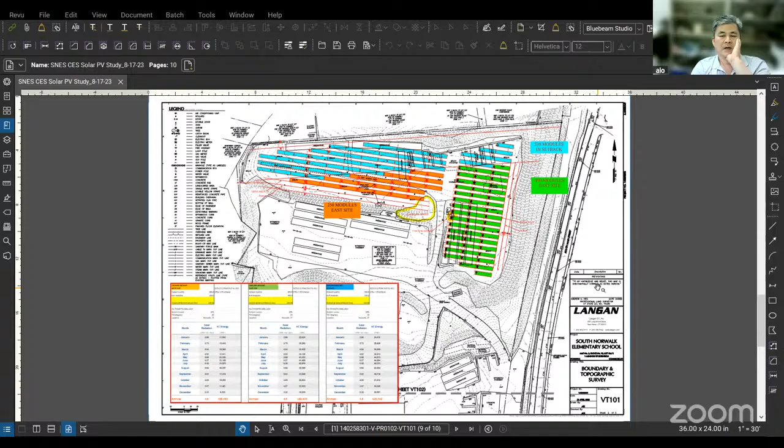So what you see here in front of you is the upper portion of the site. We were considering putting that many solar panels on the ground. And this is the footprint of the building, and we're going to put that many solar panels on top of the roof.

Because this is SNEW territory, SNEW becomes the developer of this project, and that's where some of the challenges begin to appear. The way it was originally going to be set up, the strategy was that this solar system can be put in what you call before the meter or after the meter.

When you put it before the meter, that means you're supplying electricity back to the grid. When you put the system behind the meter, that means the electricity you generate is being used in the building, and when the building isn't using as much power, you feed back to the grid and the meter turns backward. So before the meter and after the meter mean two different things.

For this project, the way we were envisioning it is that SNEW would develop the solar system, and it would be before the meter. That means all the electricity the ground-mounted system and the rooftop system generate would directly feed the grid. Meanwhile, the City/Board of Education will be paying for electricity based on the amount we use. The meter will operate normally, and we will pay electricity the way we normally pay SNEW, and there's no savings on it.

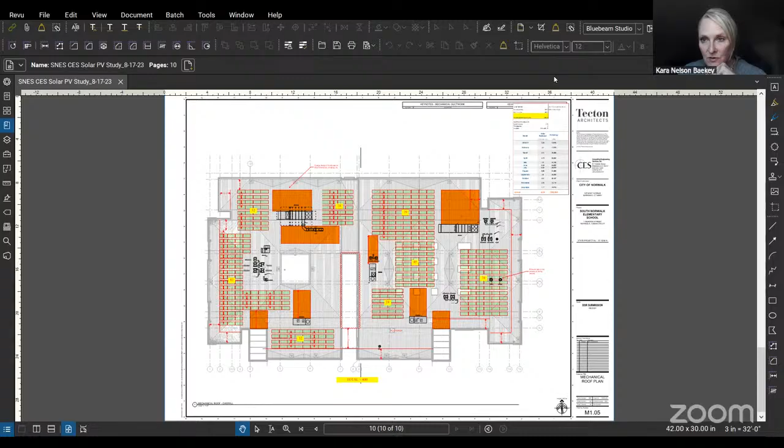So that's another angle we can look at to see whether the financials of this work. Looking ahead for opening day, safe to assume we're just going to be using traditional energy sources? And what does that look like?

SNEW has mentioned that a certain percentage of the power they buy is already green, so it's not like... I mean, there's using electricity. Right now, when we design a new school in today's world, with energy efficiency in mind, the way we design this building, probably around 80% to 85% of buildings run on electricity. It's the current strategy in the industry to design buildings using more electricity.

I think that's a good and bad thing. Initially, the electrical cost is going to be higher because you're heating the building with electricity. But the theory is that as time goes by, electricity from the grid is going to get greener and greener. So that's the industry strategy in terms of making buildings more electrical. Also, with electricity we can use more heat pumps, which are more energy efficient. So it's a combination of different things - that's why 85% of these buildings run on electricity.

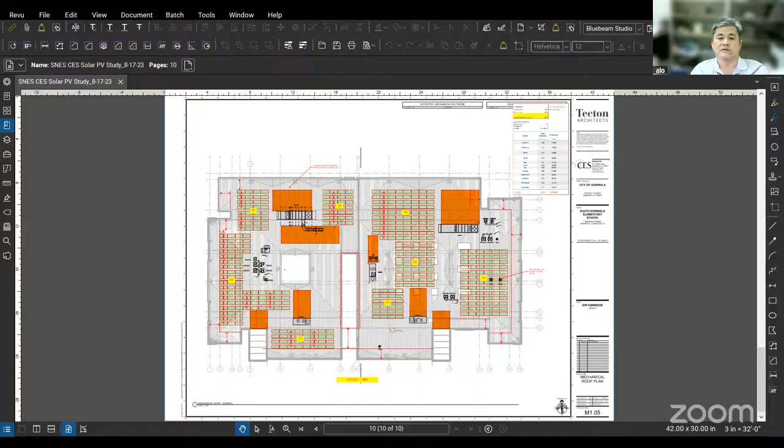And the places where you still use natural gas really come down to areas like the gym, the larger spaces where electricity heating doesn't make a lot of sense. When you use natural gas to heat mechanical equipment, it's a little more efficient because it's a large space. So anyway, that's where we are. Thank you.

Anybody else? Alan, were you also going to discuss the Norwalk High School P-TECH project solar? Yeah, I want to just briefly hit that a little bit. Are you guys okay? I apologize. Is everyone okay with us moving on to the next project? Is that okay? I'm good.

So Norwalk High School - we also plan Norwalk High School. Currently our plan has two features: one is the rooftop system, and the other is the carport system. Dan, can you put up that report? Yep, I'll put it up right now.

Because Norwalk High School is a multi-year construction project, at this point we are not prepared to apply for any incentive money, and it gets very complicated. But in any event, here's the footprint of the new Norwalk High School, so you can see the number of panels on this building.

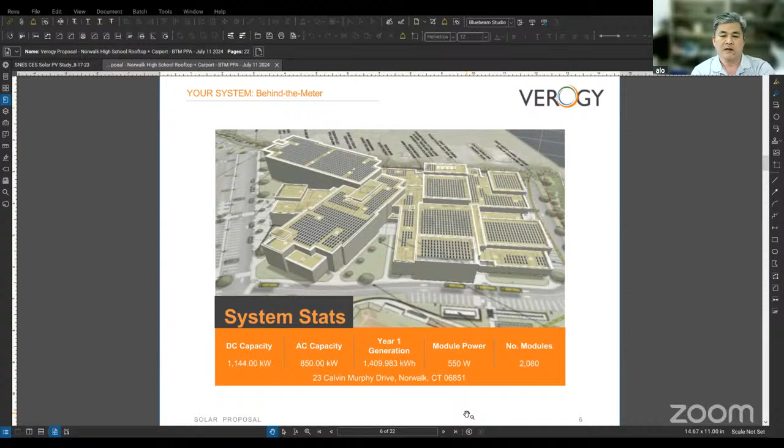Additionally, Dan, go down a little bit more - you have a few pages to the site plan. Right there. Additionally, this project actually included carport solar in the front parking lot. There's been different discussion about that.

The additional cost - when you do a rooftop system, it's pretty straightforward and not very expensive because the systems are put on racks on top of the roof. But when you do a carport system, it has a whole structural system that supports the carport, and there's also large footings underneath to support the cantilever arms that come out to support the solar panels.

The cost makes a difference financially when you do a carport system - it's not as cost effective in terms of savings. When you look at the rooftop system, over 20 years the savings I believe is like $600,000. Meanwhile, the carport system is about $170,000. And we figure the present value of $170,000 over 20 years is not really a lot of money.

But what we give up is a very difficult sequencing in terms of construction to put this in while we're trying to renovate the building and tear down the existing building. We also have a whole storm retention area underneath below the structure, so coordination and all this becomes a very challenging issue to manage.

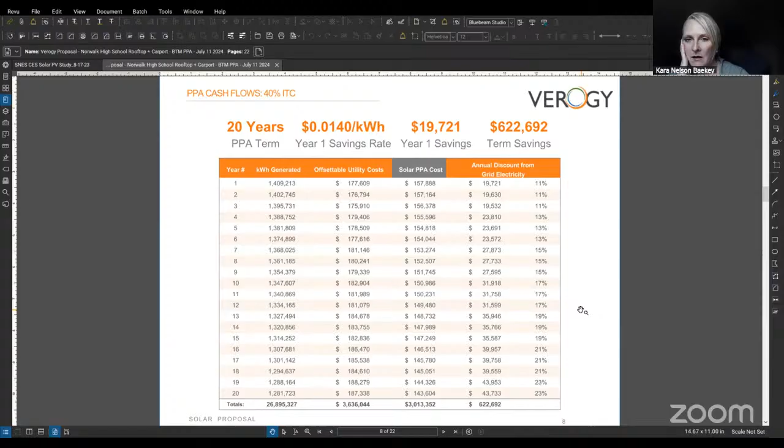So we have time, obviously, to figure that out, but I understand the carport is not as beneficial as the rooftop here. My concern, I mean, I love the idea because of the savings, but my concern on the carport, not so much the new drivers—

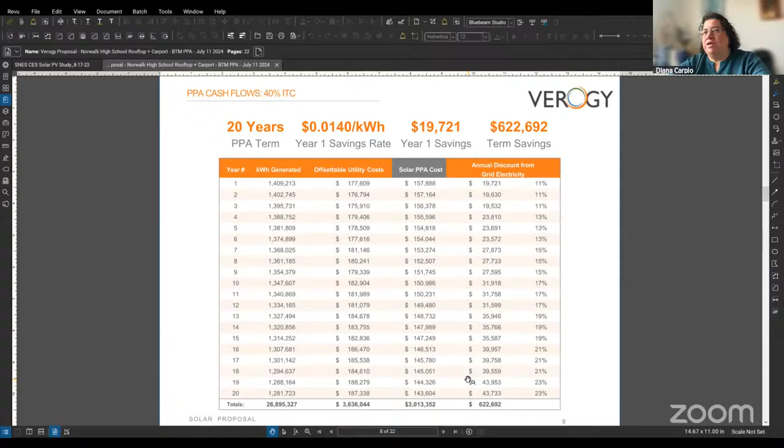Can we go back a couple of slides to show that? Is there room for emergency vehicles like fire trucks and things like that? I'm looking at the building in case—you have the car parking there, but also in case of any type of servicing, like if you need a big truck for anything in particular, if something happens at school.

Yeah, I think there's definitely pros and cons. Some of the things we talk about is that even though it's not fully covered, underneath the solar panel is covered, but at the same time you still get daylight coming in between the aisle. In wintertime, snow-wise, you get a little bit of snow drift, but at the same time it's actually a good thing a little bit.

On the other hand, it does create a little darker shaded areas for security purposes and concerns and stuff—there is that kind of aspect. I'm not trying to sell this or not sell it, but we consider all these factors. At some point, is it worthwhile to do this?

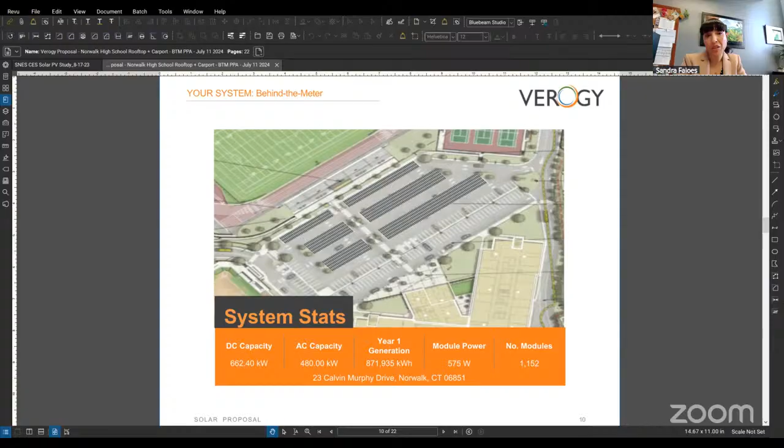Thank you, Alan. Alan, just make sure that you keep us in the loop if this comes back up with either the Common Council or land use or anyone like that, because I don't want to lose what the members of this committee have shared in terms of our concerns with the sight line and the possible safety concerns that can cause for us.

Very good, thank you, thank you so much. Alan, we had another point that you were going to discuss on tariffs, and then I think we're going to turn it over to Dan for his updates.

Sure. I think everybody's aware that as a country there's a lot of conversation about tariffs and how it impacts overseas material and products coming into the country. That has come up in different conversations. When you look at the project we have currently, South Norwalk School is not going to be affected as far as I know, because as some of you visited the site about a month ago, the steel and everything is coming in, and in terms of commitment to material, we passed the point of getting raw material from overseas. So it should not have any impact on South Norwalk School.

However, Norwalk High School has that potential. Generally speaking, we're roughly probably 40% complete on steel erection, and all the structural steel has been bought already, so I don't think it's going to affect us in terms of steel as a raw material coming overseas or the overall market.

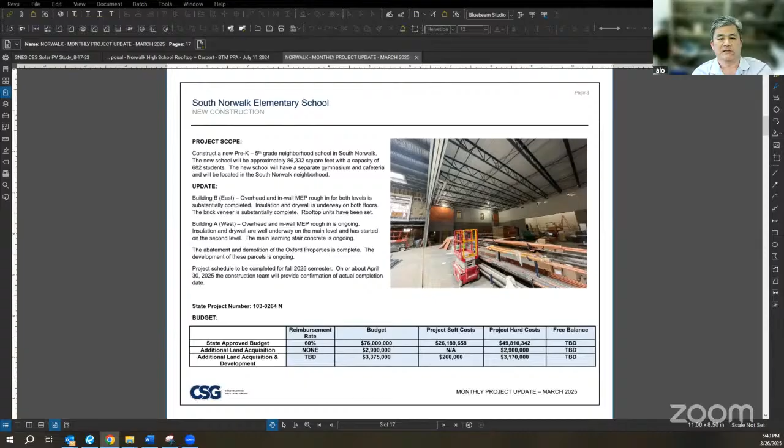So it's a very challenging issue. To push them, typically we'd have a bond to challenge them and enforce the financial aspect of the requirement, but when it comes to the manufacturer, there is none - you generally have to go sue them. It's playing softball and hardball at the same time, trying to push and get what we can. It's a lot of negotiation, working together and against them to find common ground so what they promised to deliver, they actually deliver. We need the rest of April to confirm we'll get the delivery and that our options will hold. So there are still challenges ahead of us. Thank you, fingers crossed.

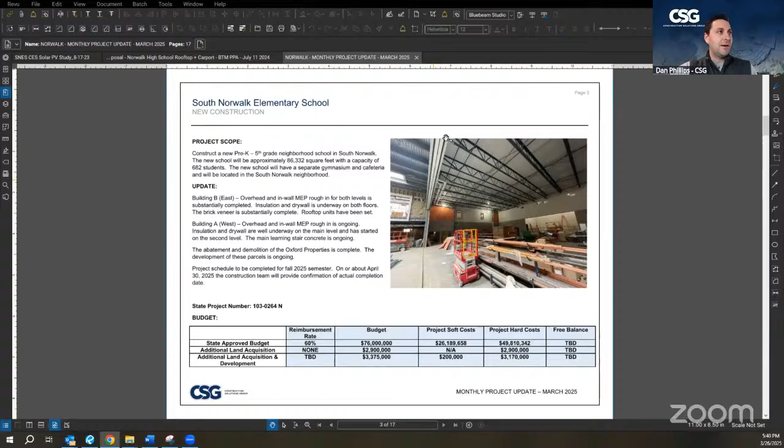As noted before, here's a photo of the gym on the right, cafeteria on the left, and that dividing curtain would be right above where this photo was taken from. This is the service area side of the building, the east side, the side we started on, so it's the most progressed. You can see the second floor glazing has been installed, and there are temporary doors on the first floor with the frames installed.

We rotate to the front side of the school on the south side. This is the cafeteria entrance. You can see to the left here in the stairwell, lots of light with that glazing going in, and above that entrance, glazing should be installed shortly.

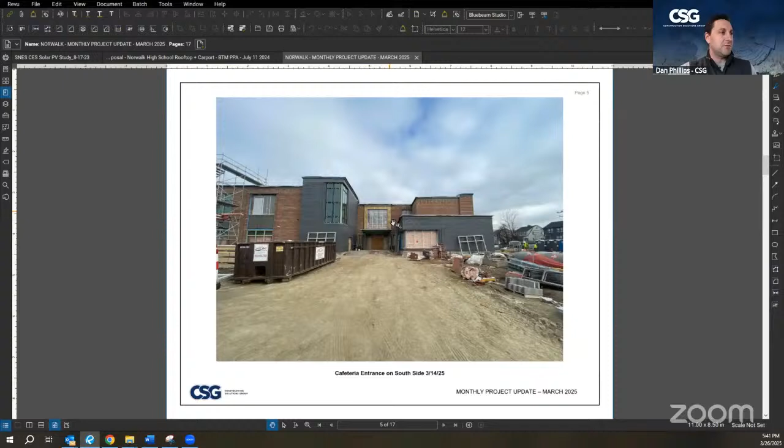Stepping back on site, over to the right here is that same cafeteria entrance, and to the left where this red truck is parked is the main entrance to the school with the main corridor and the learning stair behind it. You can see some of the curbs taking shape out on site, and this would be where the parent drop-off circles around and exits towards where we're standing in this photo.

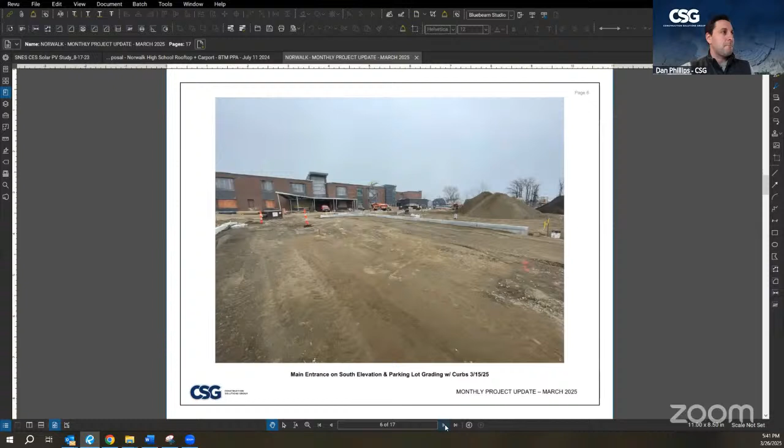Rooftop units on the roof. Oh, that's exciting. Not that exciting, but I got excited by the curbs. You get excited by the rooftop unit stuff. There are also curtain wall frames here that will go into these openings in the background, so there's more than just a rooftop unit.

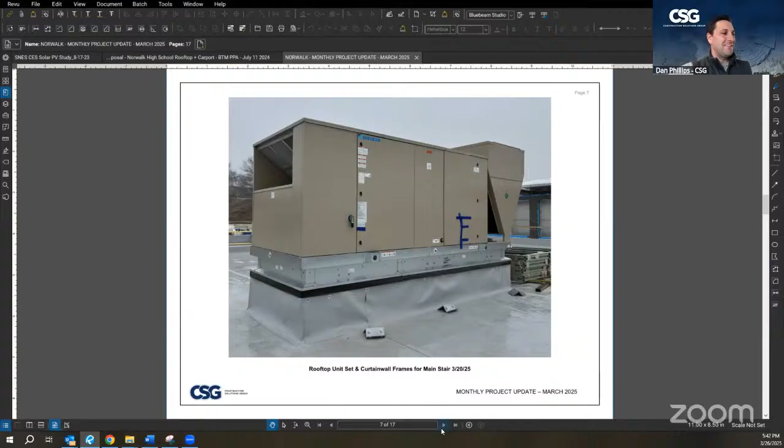Also not that exciting, a little rubble here, but this is where the Oxford properties were. Once these piles of soil are removed, you start to see how much this is going to open up the site and how much you can see from Oxford over towards the school. This is where the proposed new basketball court is going to be, generally speaking. And fencing, I'm assuming, because that's a road right there, right?

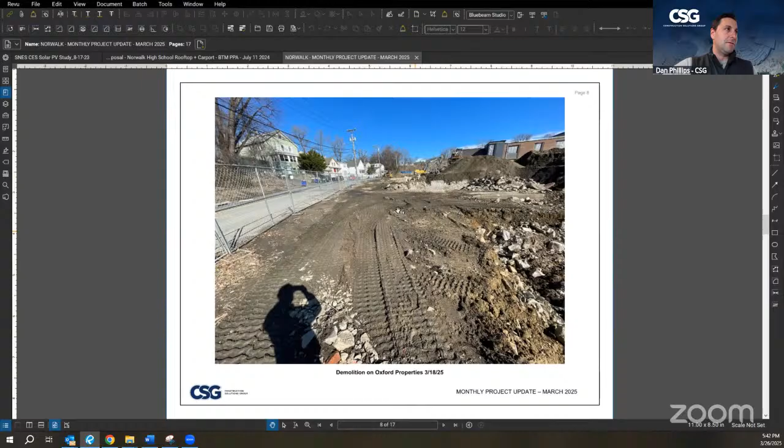The basketball court is set back from the road. There's a fence around a portion of it, I don't think the whole thing. There's some landscaping between the road and the court. I think there is a fence that does run along the entire outer border as well.

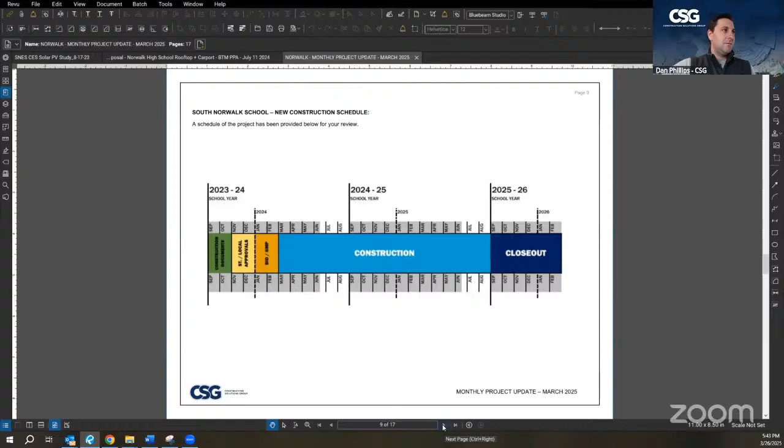That's what we have for South Norwalk. Any South Norwalk specific questions before we jump into the high school?

I ran into a current teacher at South Norwalk School who is super excited, whatever we're going to be calling it. She asked me if I knew whether there would be any opportunity for the staff at that school to get a tour or a walkthrough before the school opens.

We typically do, because it's more than just PR. A lot of the community is very excited about the school, and it's important to build that energy as we move forward, especially for teachers who have to pack up and move everything.

Similar to Cranbury School, before it opened we actually brought the teachers into the building to tour it before the end of the spring semester, so they could see the progress of where the classrooms were going to be. It brings a lot of joy and excitement.

It would be amazing if it's far enough along before the end of the school year that in June we're able to let some staff and community members in to see it, whatever is done and safe for accessibility.

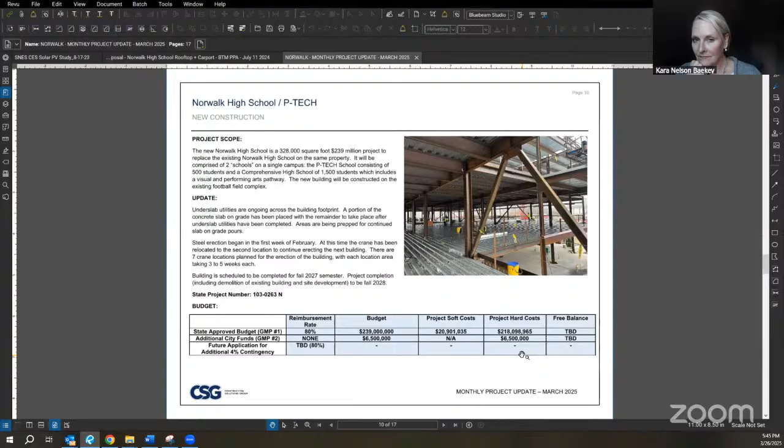This is the largest elementary school in the district. If you went on that tour we had, there's very interesting space we don't have at any other school - a multi-purpose cafeteria and gym tied together in a single area with a dividing wall that can open up, since it's the biggest school in the system. They're creating more common space for major gatherings, with a 2-story space in the main corridor and the library, which is a story and a half to 2-story section. There's a lot of architectural amenities in this building that we typically don't see in elementary schools.

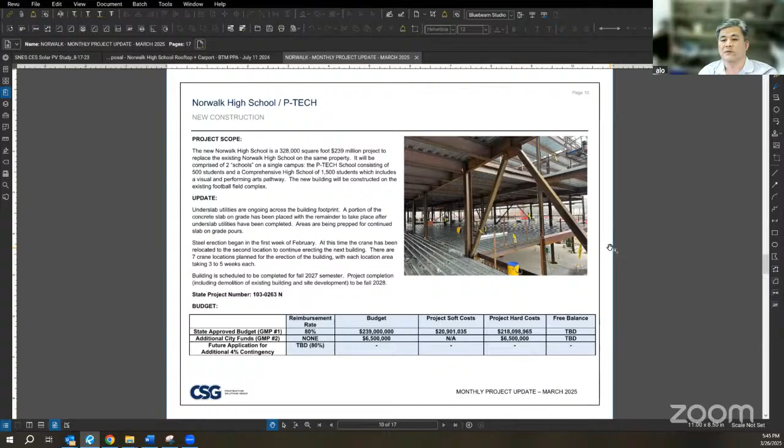So I can work with Alan and Kara to see if we can organize a tour prior to the school year ending, if that's okay. I want to move us along because I know you guys may have some travel to get here to the meeting. We're all jumping on Zoom, but thank you.

Has the naming of the school been moved along at all? No, we haven't approached that yet. I think there'll be some community involvement, a survey, board involvement - it'll be like a whole campaign. I know that there were some names suggested, and that would be part of the consideration. Typically with naming schools, you get some stakeholder feedback. Exciting. Okay, thanks, that's all I had.

Okay, I'll do a quick update for Norwalk High School. No, you have time. I thought the team needed to travel. Yeah, we're gonna jump on Zoom. Thank you. And I'm here, so it's not a big deal.

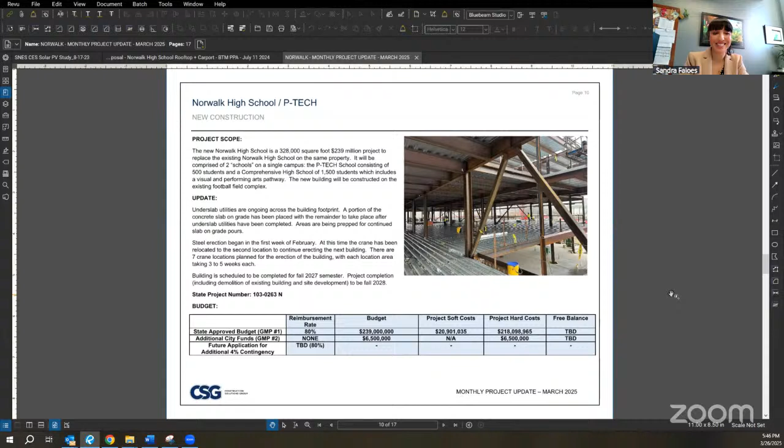So we have a picture to the right here, the first section of the building that's been erected. Metal deck is down, they're detailing up on the upper floors, completing the deck. Some of these slabs were scheduled to be poured this week, and we also have slab on grade ongoing across the site. Steel erection started the first week of February. The crane has been relocated to a second location, a little bit closer to Naramake Elementary School.

I believe there's another shift coming in the next couple of weeks, and the crane will continue to make its way around the site. I think there's 7 planned crane locations, and depending on the area and the access to the amount of steel that they can erect from that position, each area will take approximately 3 to 5 weeks, depending on what location they're at.

Just a general recap of what the project timeline is. Scheduled to be complete and open for the students fall of 2027. The total project completion date would be fall of 2028. That includes the demolition of the existing building, site development with the main parking lot, the football field, and all the other site improvements that are going in.

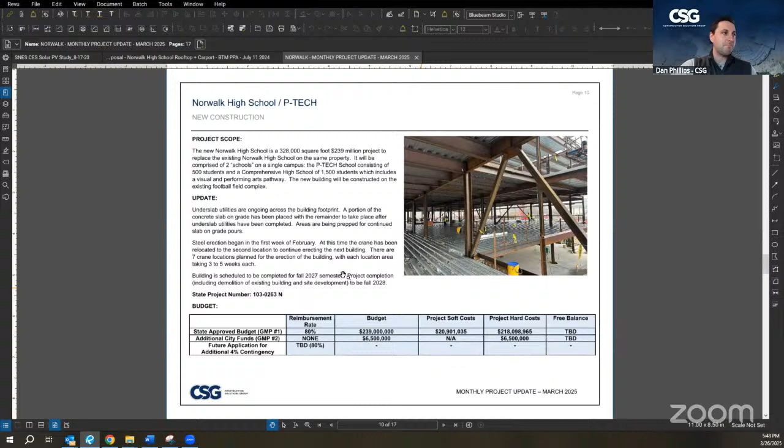Great. So everything's on schedule at this point, budget and timeline wise. Yep, yeah, I just want to elaborate, just want to be fully transparent.

When we bid out this project like a year ago, and we bid out the construction work, there's a few things that we did not bid out: the demolition of the existing building and furniture and fixture, because they're too early. I think the furniture, we probably won't go to bid for another year. But meanwhile, we are bidding out the demolition of the existing building, and there's a couple other things that go with some concrete work and things like that. So if you see anything in the news media about us bidding construction, there's certain things we never bid out.

So we are bidding it out right now. And we intend to request additional contingency money from the state, which is roughly 4 to 5%. That's why we see this update. There's future money, it's about 4 to 5%. It's very typical for us to do that in any event.

So just want to let you know that at this phase, which is the major phase of the project, we are on budget, on schedule. But we do anticipate that there's additional money needed for the demolition of the existing building and all, which has always been anticipated, but it's ongoing.

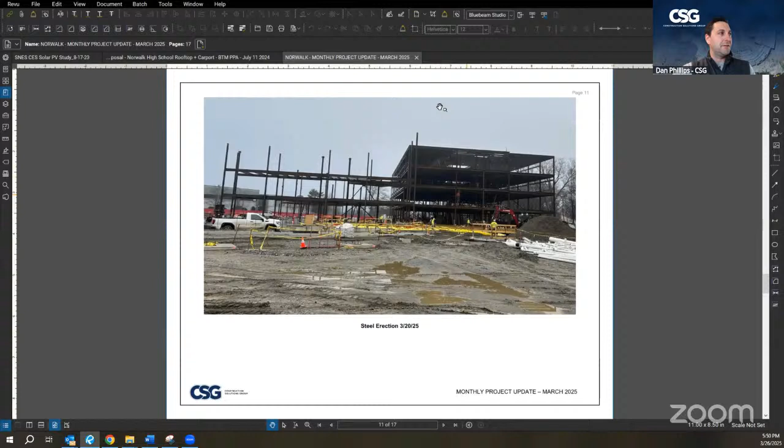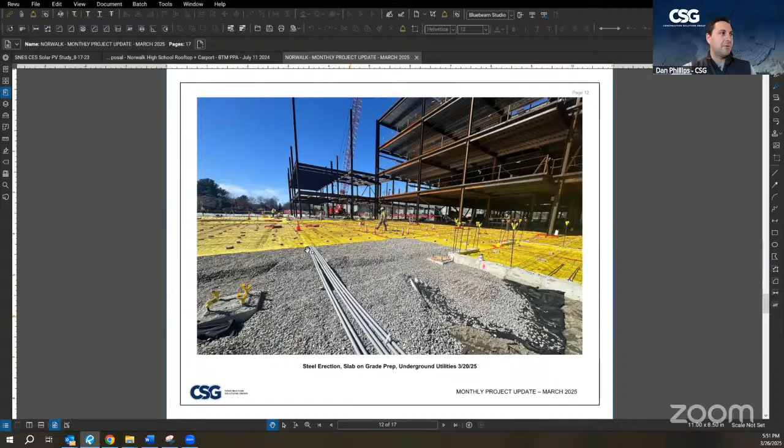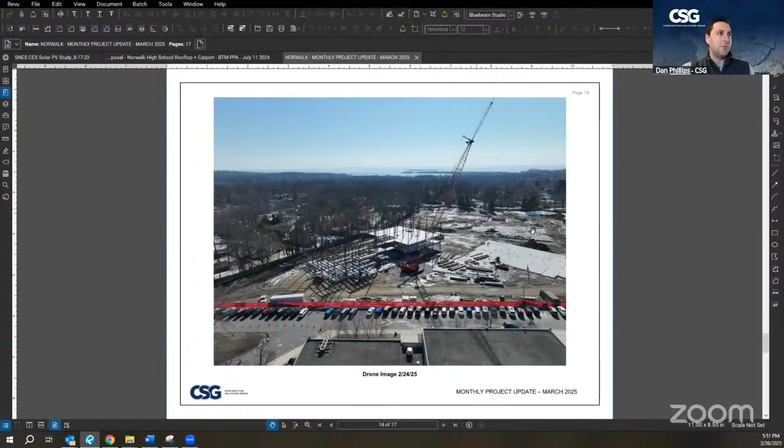That's what we have for the high school. Any high school questions? Not from me, thanks, Dan.

All right, and just a couple of quick notes on the HVAC upgrades. I'm sure Alan or Bill may have a little more information on this that they would like to expand, but the Brookside School, this was awarded to F&F Mechanical. They've executed their contract and have ordered the rooftop units. They're continuing to work through the submittals for the project, and the team is meeting every week to coordinate the construction at Brookside.

The next grouping of schools: Rowayton, Brien McMahon, Naramake, Marvin, Silvermine. Newfield was the successful construction manager on this project. They're continuing to work through the design documents and constructability.

We're going out to bid for the contractors, the trade contractor, to perform this work on April 1st. From there, our timeline for approvals is to have the GMP complete end of April and go to land use and common council in May, with the plan to start construction in June of this year.